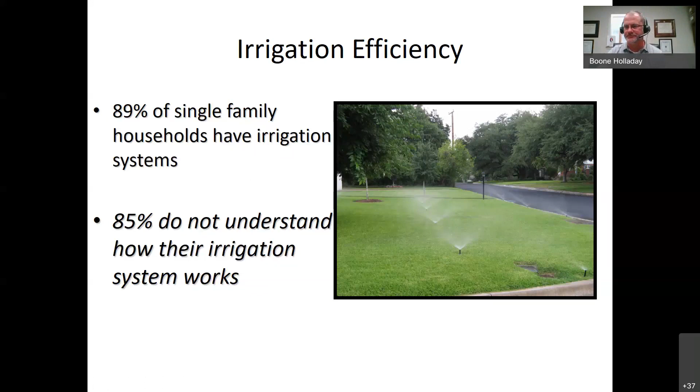Suma, do we have any questions so far? Not yet, Boone. All right.

Okay, so just some of the things that we discovered when we're talking with homeowners is we don't know how long to water. So this is your run time per station. We don't know how often to run our programs. I talk to a lot of people on the phone and they have disease pressure in their turf grass.

And as I ask them how many days a week their irrigation is going, a lot of times it's every day is their response. And that is not only way too much water, but it is probably the culprit of the disease problems that they're dealing with. They don't understand plant watering requirements, that some plants are mesic, some are hydric, and some are xeric. These are plants that either don't need much water at all or need a lot of water.

Consider precipitation in this equation, so we're not just applying an inch a week of irrigation. We need to keep track of how much rainfall we've had to help decide if we need to cut back on it or just turn the system off. Right now, the answer is probably just turn the system off.

How to set your irrigation controller and change the settings as needed: go in there and reschedule your program times. It's kind of daunting at first for people who haven't done it, but if you follow your instruction guide or utilize tutorials and videos online, you'll find it's actually very easy to do. And just do general maintenance of the system, making sure everything is working properly.

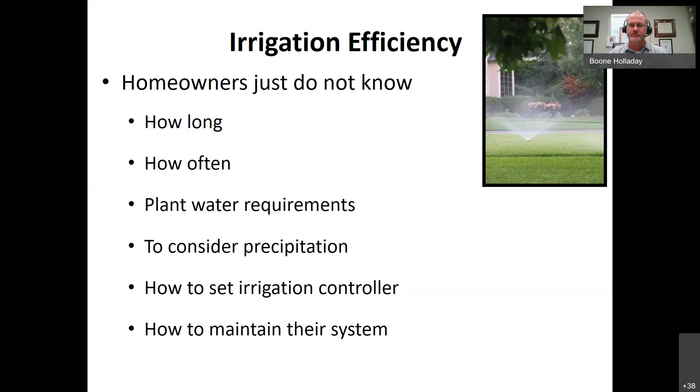Boone, there is a question from Prem. He's asking, how do you locate the irrigation system valve for a specific zone?

Let me see the question. I don't understand the question. How do you locate the irrigation system valve for a specific zone? I think he's meaning like each valve takes care of one zone, right, one or two zones, whatever. So is that his question? I don't understand the use of the word wall. Just valve. Valve, I'm sorry, valve, okay.

Very good, very good, and I'll get to that once we start looking at the bits and pieces of the system. Valves, yes indeed, that'll be coming up here in a little bit, so I promise I'll address it.

After 30 years living in this country, I still have a strong accent. What can I do? Well, we all just meet in the middle, that's what we do.

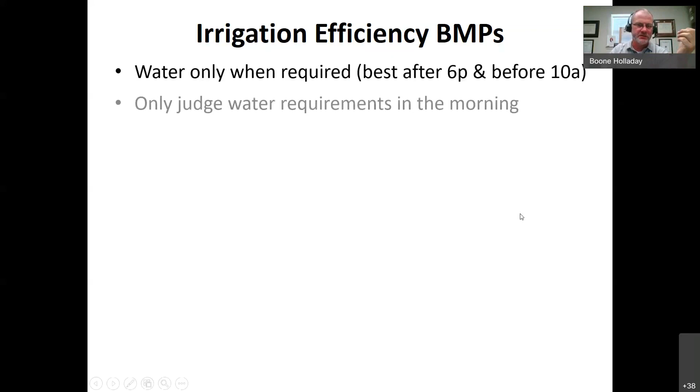All right, so here we have best management practices. I'm going to go ahead and highlight all these so I don't have to mess with all this.

Water only when water is required. It's best to water after 6 p.m. in the summertime and before 10 a.m. Watering in the morning is the best option, early, I would suggest right at or before sunrise.

This is to minimize disease pressure, because the longer the grass, leaves, shrubbery, annuals and perennials stay wet—if they're wet for more than 6 hours—we start to cause disease pressure. So that's the main reason we want to water primarily early in the morning: as the sun comes up, the moisture evaporates off the foliage and we avoid disease pressure.

Also, we're getting the most efficiency out of the water we apply if we do it this way, particularly compared to watering in the afternoon, 6 to 7 p.m. That allows the water to get there and lets the moisture dry off the foliage before sunset, so the leaves are dry at night, maximizing use of that water versus watering during the hot middle of the day.

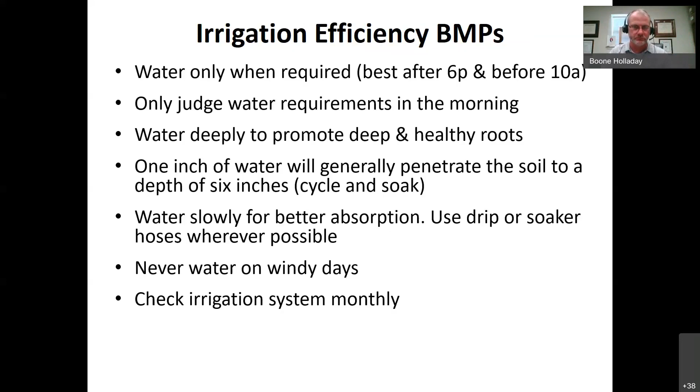You want to do another question, Suma? Yeah, I'm reading the questions. My shrubs and plants need water more often in the summer than the turf. How do I deal with this, as setting up two systems has a prohibitive cost?

Yeah, I would argue with that. A lot of our shrubs are actually pretty drought tolerant, as long as we have consistent moisture in the soil. The difference between turf and a lot of our evergreen shrubs is rooting depth. Our turf grass tends to have a fairly shallow root system because we are constantly cutting the top of the plant off, so its root system tends to be very shallow as well. And that is kind of the reason why the moisture needs of turf grass need to be more consistent.

But with shrubbery and appropriate annuals and perennials for our area, those roots grow deeper and down into the soil, wider into the soil profile. And so their ability to scavenge for water and nutrients is much better because of that. They can make it through a little bit more up and down as far as moisture availability in the soil than turf grass can.

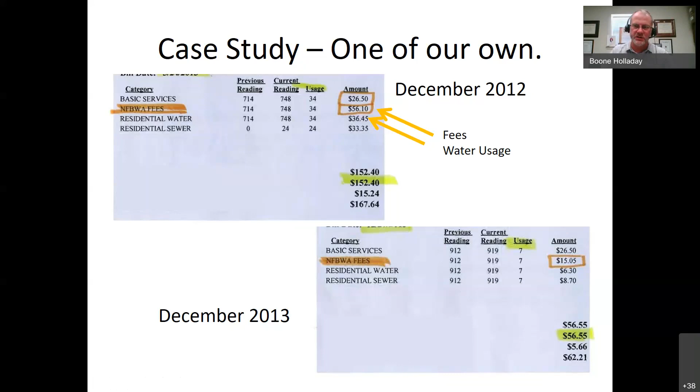So we went from $167 down to $62. We did a little quick measurement that suggests a monthly decrease of about 25,000 gallons of water, and an annual decrease of 300,000 gallons of water that were just put out into the landscape - water that we didn't need to put there.

We made the changes, and actually the aesthetics of the landscape increased. That means the plants were performing better, the grass looked better, and so it improved. And then we ended up saving 300,000 gallons.

The other thing with this is that she noted, it's kind of like a face of shame thing, right - you get this letter. But after she started talking with her neighbors, most of the people on her block had gotten the same letter. So that suggests that countywide or regionally, if we can calculate this amount of water that we're putting in the landscape that doesn't need to be there, it's quite significant.

So if we're not talking about just the environmental impact of all this water, we could talk about the homeowner savings. This one we calculated out to about $1,100 a year in savings off their water bill. I don't know about you, but $1,100 would be the difference between going on a family vacation or not, or making a decision to put a down payment on a new vehicle, or maybe getting LASIK I've been putting off for years. It would be the decision to do something good with my life instead of giving this money to somebody and not having it in my bank account. So that's important to me, and I'd assume it's important to most people. This is a very legitimate reason to be thinking about water conservation.

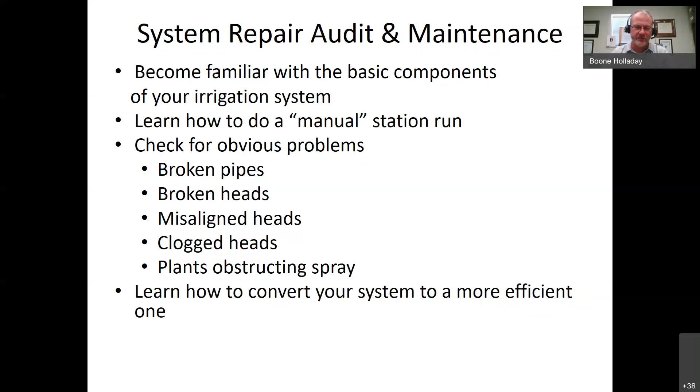Okay, cool. All right, so this one here is repair, audit, and maintenance. We need to become familiar with the basic components of the irrigation system. We need to learn how to do a manual station run on our controller. And then for obvious problems, we need to go through the stations and check for broken pipes, broken heads, misaligned heads, clogged heads, plants that may be obstructing the spray, to get the water where it needs to go, and then look at ways we can convert our system to become more efficient.

So this is a very important part. We want to make sure it's working properly and not leaking water. I know a lot of people during Winter Storm Uri had broken backflow preventers that busted one or more components of the brass assembly. So I would go walk out and review that area, looking for dripping water, wet spots, either on the pipe or down on the soil beneath the array there. Put your hand down in the soil — if it's very soggy and wet right there, more than likely you have a problem that needs to be addressed. Everything past the backflow preventer, a homeowner can repair themselves. But from the backflow preventer forward, back towards the municipal water supply, those repairs need to be done by a licensed irrigator, particularly one with credentials to work on backflow preventers.

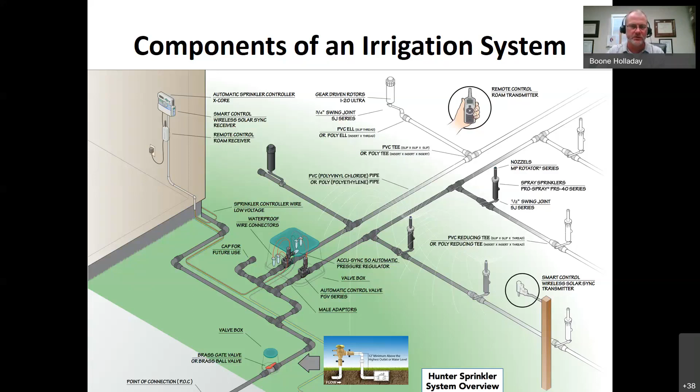The one thing to be thinking about when we're looking at these, or at least for you to note, is that the way this works is when our system pressurizes, we have water that goes one way, and it creates pressure within the system, water pressure. When we turn that valve off, it creates a very temporary back pressure, it goes in the line. So there's water in the PVC pipes and the valves and the system that has pressure that's now kind of pushing its way back to this. And so what this does is the assembly in here has a diaphragm that does not allow that water to go back into the main water supply.

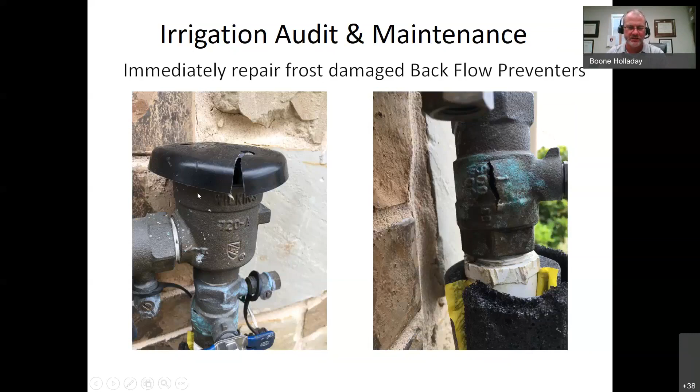Heads. There's always little problems with these pop-up heads, because sometimes they stay in the up position. We either have some dirt in the line, or a little bit of extra water pressure in there keeping it up. Then the lawn crew shows up and they don't see these things, and they hit them with mowers. Or we're playing football out there, run over them and trip and bend them. So there's a whole lot of reasons these things get messed up.

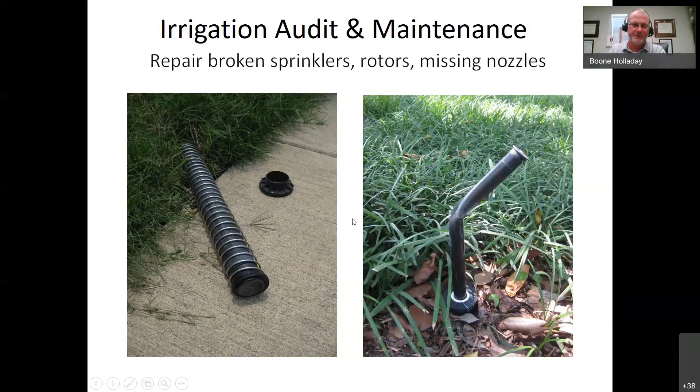And this would be kind of what you would see here. The whole top part of the spray body has come off. This top piece here has cracked and probably just separated. This whole piece flew out, so now all we have is that, and that's what's causing this right here - water just shoots up.

A lot of times with these it's kind of funny, because you might have your system set to go off at 4:30 or 5 in the morning, and you're not seeing this. So there might be a problem that's been happening for a while. That's why, going through and doing this manual run check, I'd be surprised if you didn't see at least one of these like this somewhere in your system that needs to be addressed. This is pretty easy - we turn that off, dig this out, and then replace this spray body.

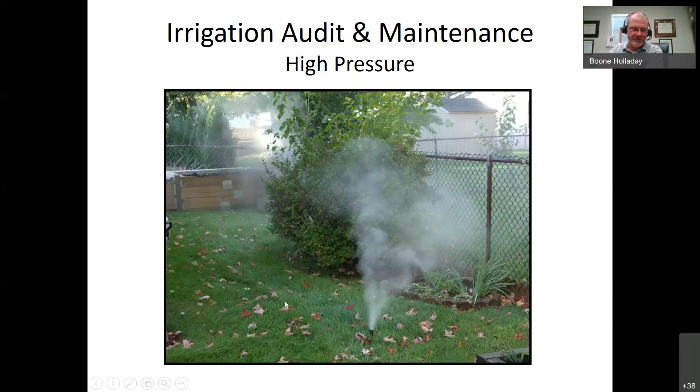Let me see if I can get this right so you see me. So a lot of these big pop-up sprayers, you can either hook the water up from the bottom like this, or you can unscrew this, move this here, and hook up your water from the side. If you've got a situation like this, it's probably easier to change the connection to the side, and then you can raise this up as high as you need it to get it in the spot you need.

Also, there's these little funny pipe connectors - threaded little pieces together - and you buy these in like a 12-inch long piece. So if this is too low, you can get a longer one of these, cut it to the length you want, install it here, and replace this. That'll give you extra length to add to bring the head up out of the soil, even with the grass, so that when it's popping up, the grass isn't impeding its ability to rise.

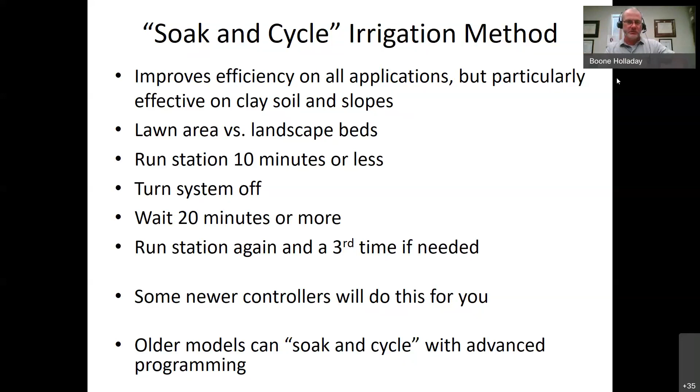Personally, it may be a little overkill for me, but I know a lot of people that use them and they're happy with them. All right. Let's see here. What's next here? Oh, drip.

We tend to say that spray heads and rotors are usually about 75% water efficient, so we're losing some water with those. With drip irrigation, we're about 90% efficient, so the vast majority of that water is being used by the plants effectively. So a great option for flower beds and shrub beds. There is some research being done on translating this into a turf grass irrigation system, but unfortunately there are some kinks there that make that maybe not work as well in a turf situation.

So they're still working out the kinks, you might say, on drip for turf grass. But for shrubs, ground covers, and annual perennial beds, this is the way to go, and pretty easy to maintain. Again, you'll need to increase the runtime on your drip zones significantly because we're applying this in gallons per hour instead of gallons per minute.

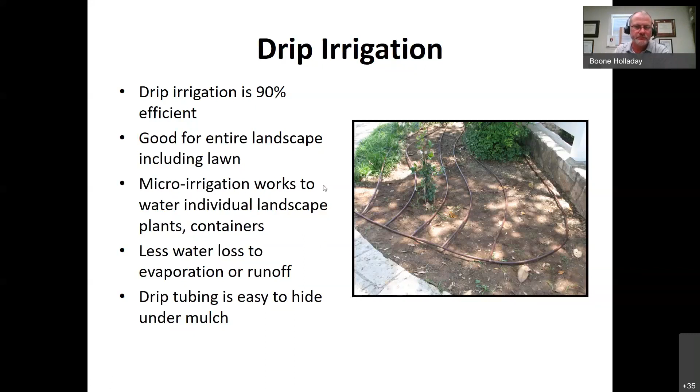This is a combination of plant loss of moisture through transpiration and evaporation. So it's just evaporating off of the plants and the soil, and it's being released through the plant cells. This is what we call ET.

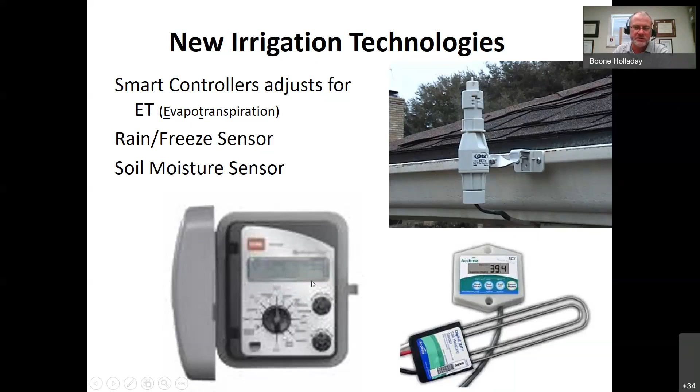And so the smart controller will adjust. So if we have a cloudy, cool day, the ET is much lower than it would be on a hot, sunny, windy day. So it'll do the adjustments for you. Pretty cool technology. I would invite you to look into it.

All right, so that's kind of the nutshell here. We've got some time left to answer some questions, but all very simple, it's using a lot less water. And by doing that, there's a pretty good chance that we're actually going to improve the results, the aesthetics, and the health of our plant material.

We're going to lower our water bills and save money so I can go on my vacation this summer, and we can feel good that we are being a steward to our local environment and that we are not water hogs wasting water in the home landscape. So hopefully you will benefit from some of these practices, and then you can address all four of these and become a big winner. Get a big winner chicken dinner.

All right. So we have a couple of questions. Yes. What do you think about battery-controlled rain sensors?

You mean controller? Probably is a battery powered controller. For small areas, like if I have a little seasonal vegetable garden and I want to use a battery powered controller to monitor the valve in the irrigation, sure, that works really good on a short-term basis for just watering. If you maybe planted a couple trees and those trees maybe need a little extra water, it's just hooking up a battery powered controller to your water spigot and feeding the water needs of those particular plants. Herb gardens, vegetable gardens, container gardens, etc.